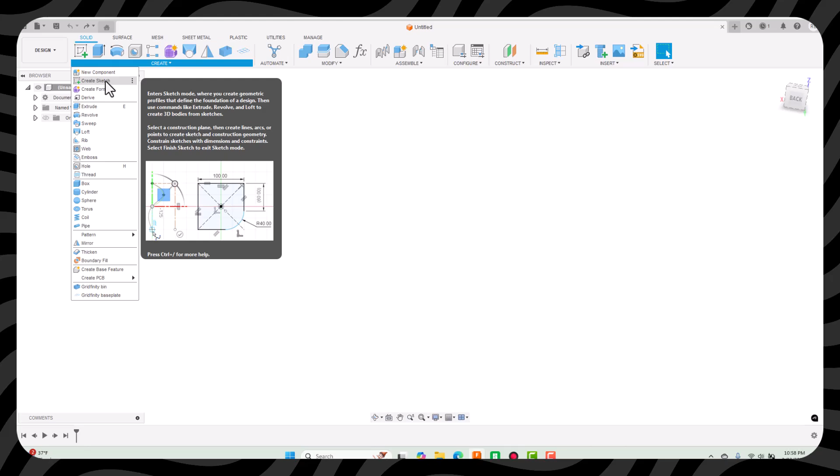Up here in our top menu, we're in design mode, so we click on create sketch, or from the drop down create sketch, and we see that we have multiple axes here that we can choose from, where we're going to start on which plane. So I typically always start from the top.

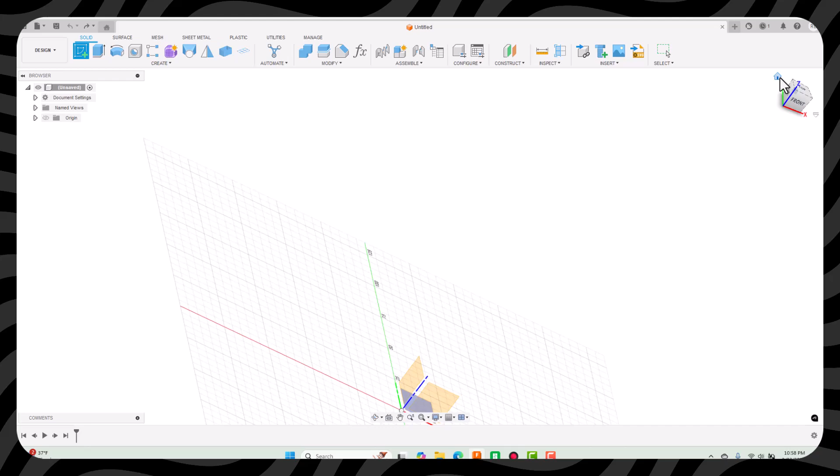One quick note, if you get lost in your drawing, just hit the home sign up here, and then we'll just click on this surface and note that our orientation here changed to top.

I'm going to pick a center rectangle just for simplicity, from our top menu. If you're using the drop down, create a rectangle, a center rectangle, and I typically always start from the origin. You don't have to, but I'm going to start there.

I found myself using metric for design. I 3D print things, and it just makes more sense to measure and do things small scale in millimeters to me. So let's say we want this rectangle to be 100 millimeters wide, and then we hit tab, and we want the width of this box to be, let's say, 50 millimeters.

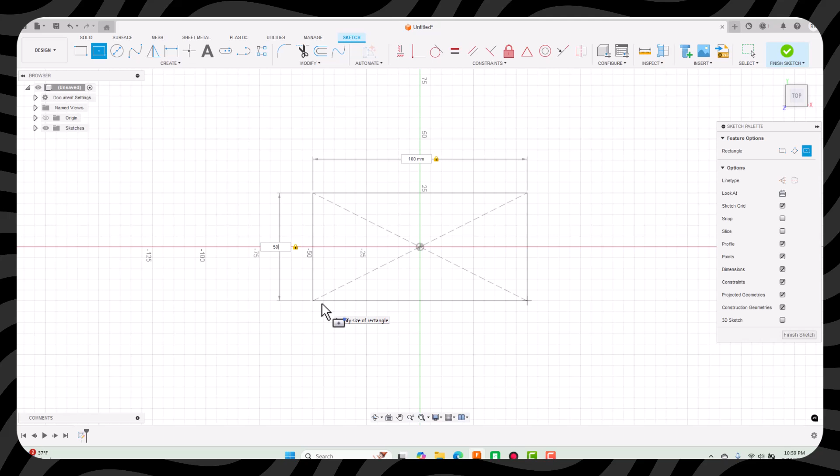Okay, now we have this rectangle that we've drawn, 100 millimeters by 50 millimeters, and it's not quite box shaped yet. It's still just a 2D image.

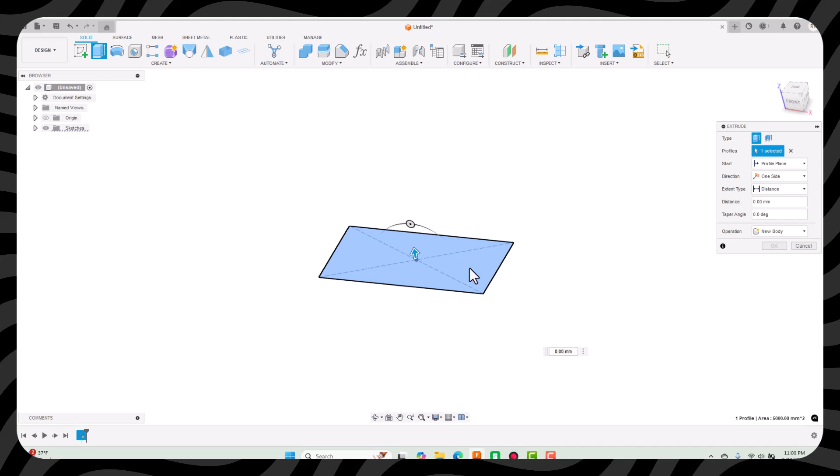So let's hit E on our keyboard for extrude. It highlights the box in blue. If you're off of it somewhere, you can always just go back, click where you want to extrude, and let's say we want to make this 40 millimeters tall. So now we have this block, 100 millimeters wide, 50 millimeters deep, and 40 millimeters tall.

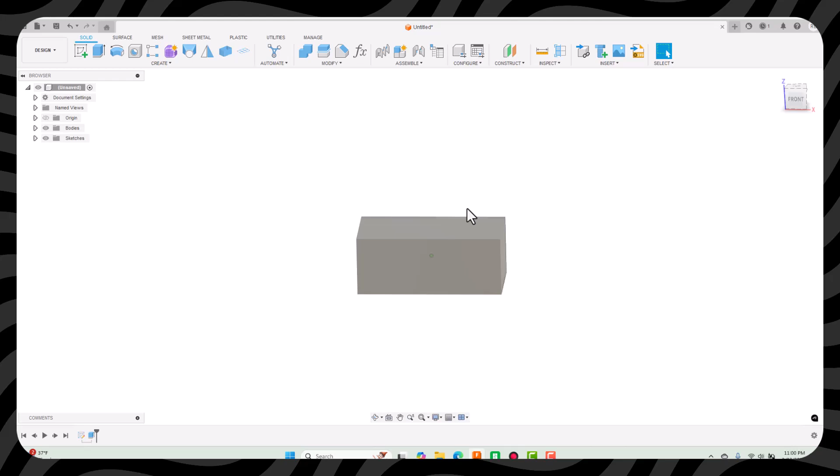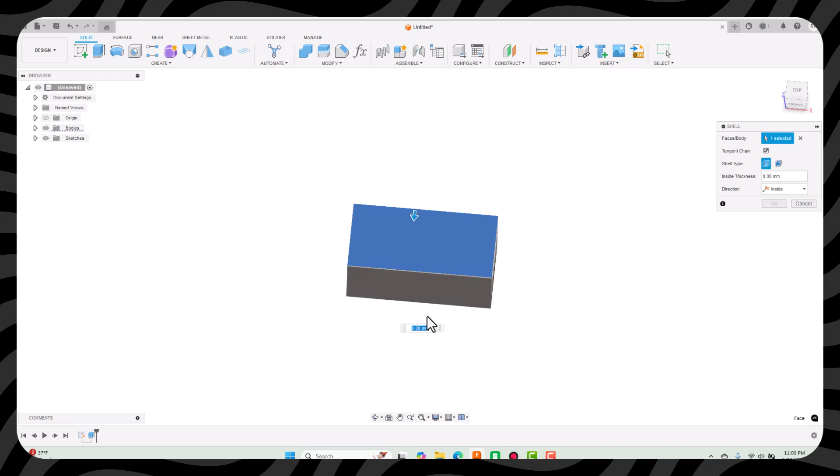Next, we'll want to right click, press shell, the shell command. We're going to shell out this block to make it into an open-faced box. We select how thick we want the walls, so what are we shelling the inside to? That'll be the sides and the bottom. And we're going to make that 2 millimeters. We can see that it's shown what it is.

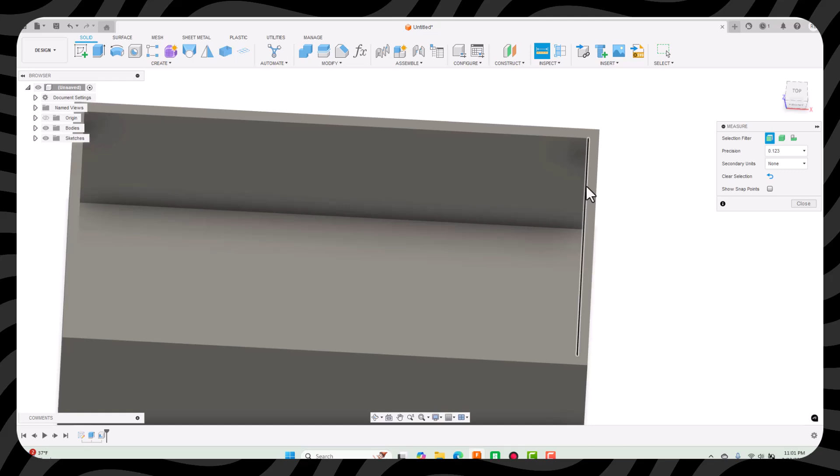Press enter. Now if we zoom in and we go up to our menu again to inspect, we want measure, the little ruler, or from your drop down, measure. We're going to click, and you can see it highlighting this edge on the inside wall. And then we're going to click the outside wall, and we see that it's 2 millimeters. Or over here, 2 millimeters.

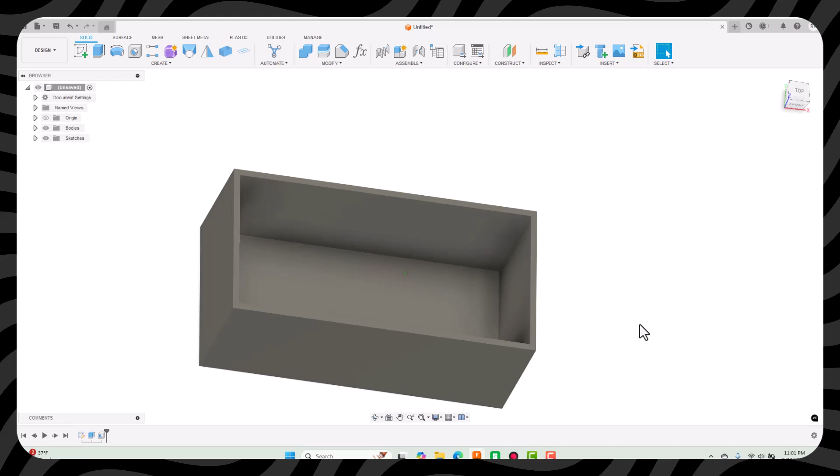I hope this is useful to folks just starting in Fusion. I know there are a lot of really great series out there. I would encourage you to Google them, search on YouTube for them, and use them. But if some of my quick, short videos help you, I'm happy to continue to make them.